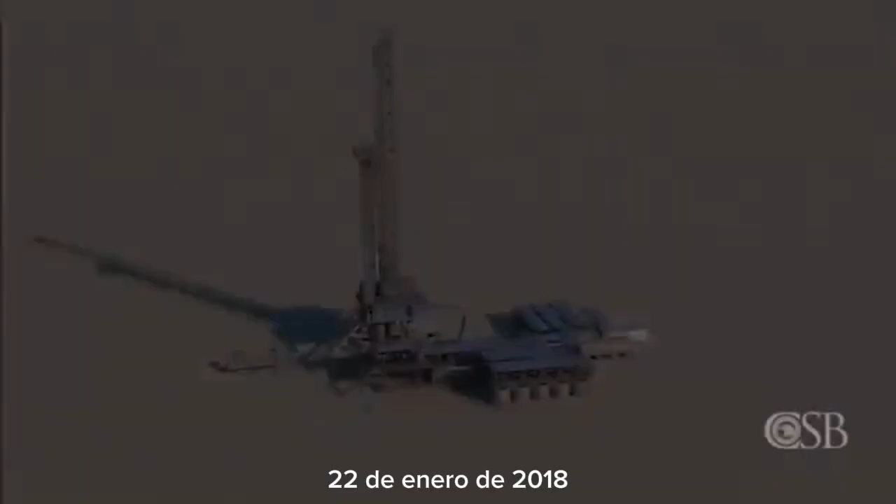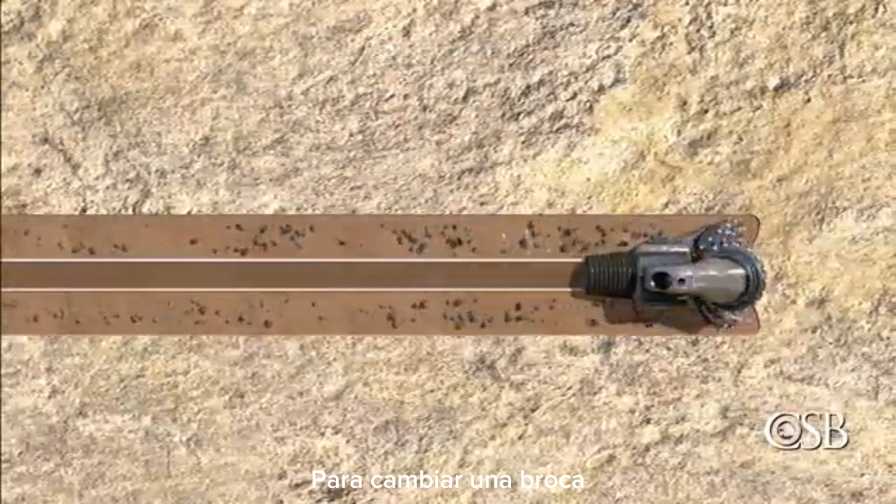January 22, 2018, the Pryor Trust gas well in Pittsburg County, Oklahoma. The well was operated by Red Mountain Operating LLC, which contracted the Patterson-UTI Drilling Company to drill the well. In order to change a drill bit, crew members removed the drill pipe from the well. Approximately 3.5 hours later, a blowout and rig fire occurred, killing 5 workers.

Industry best practices recommend having 2 protective barriers in place at all times during drilling operations. But our investigation into the incident at the Pryor Trust well found that both of those barriers failed. The safety management system utilized at the well was simply not effective, and the result was a catastrophic blowout and fire.

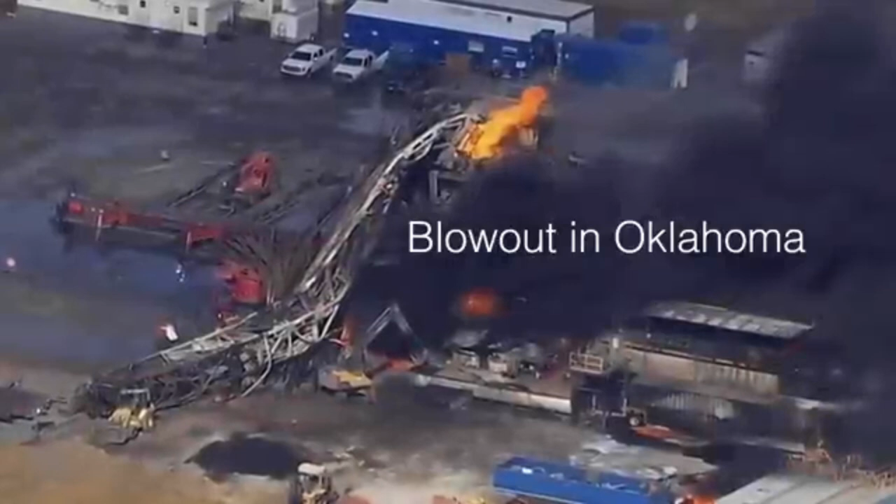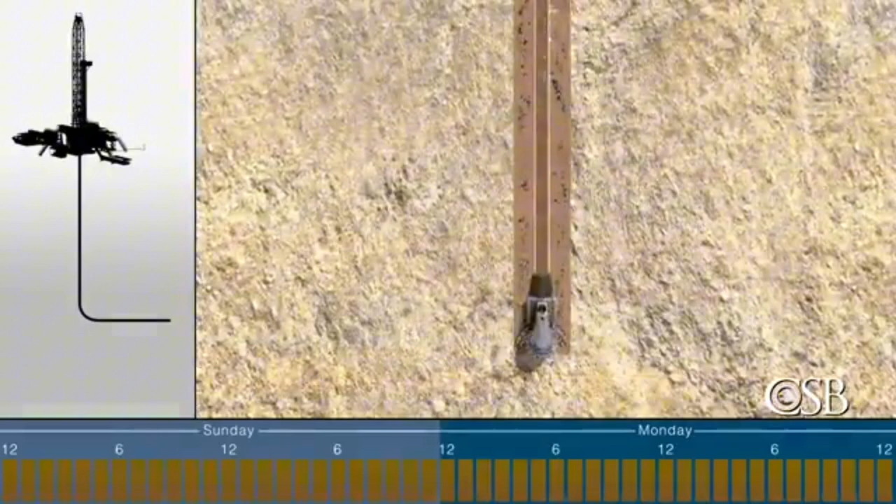The Pryor Trust gas well was comprised of vertical and horizontal sections being drilled to reach underground natural gas in the Woodford Geological Formation. During drilling, a diesel oil-based liquid called mud is pumped down through the drill pipe and back up through the area of the well outside of the drill pipe, called the annulus.

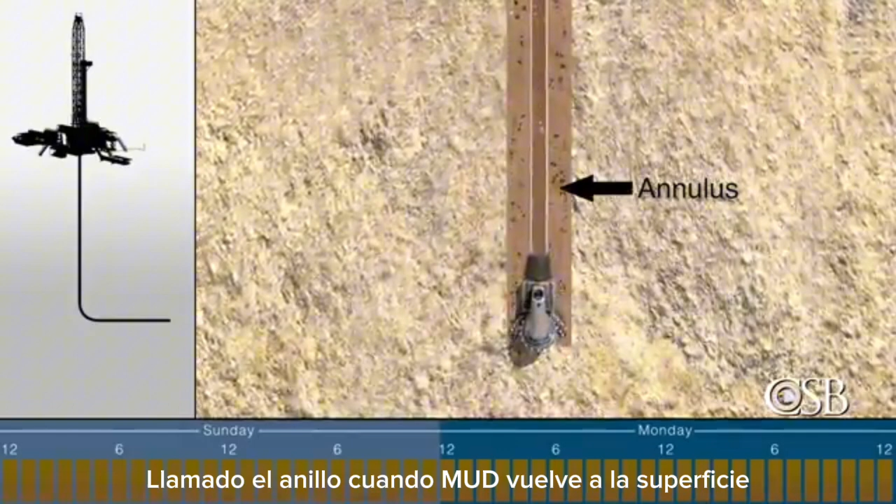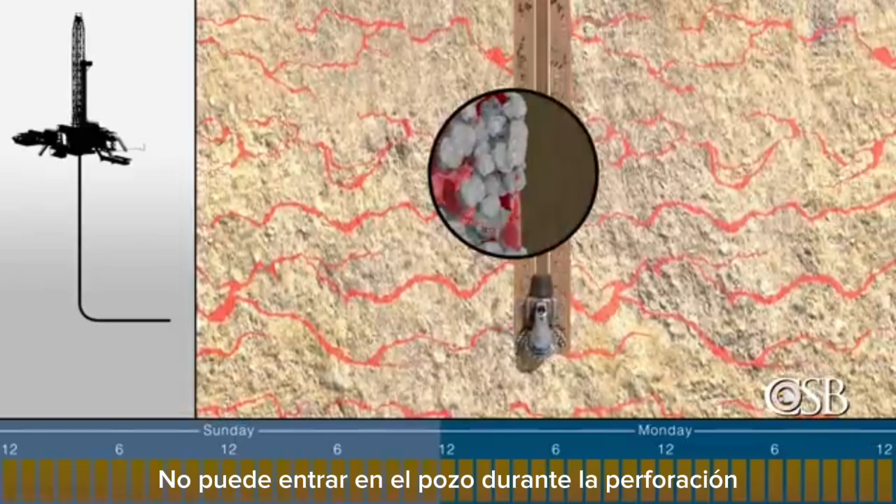When mud returns to the surface, it includes rock cuttings from the bottom of the well. Mud, however, has another important function. It is designed to add pressure to the well so that gas within the exposed geological formation is unable to enter the well during drilling. If that happens, and the gas is not detected, it can lead to a dangerous blowout.

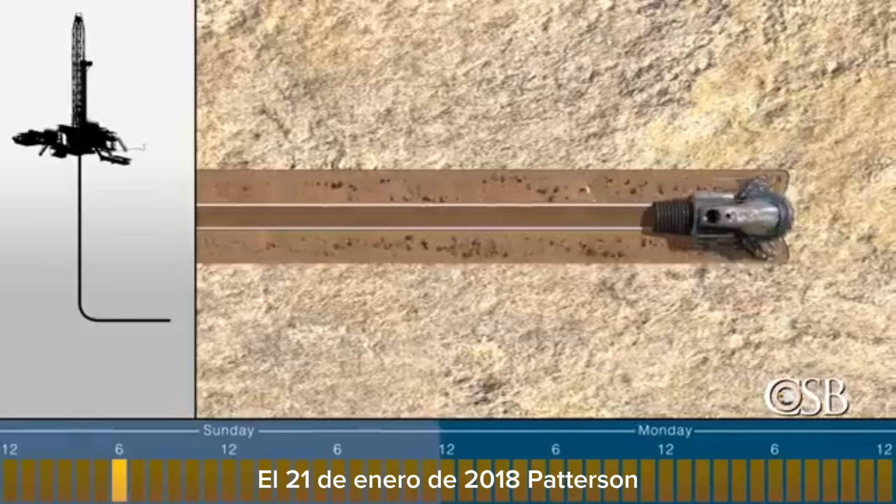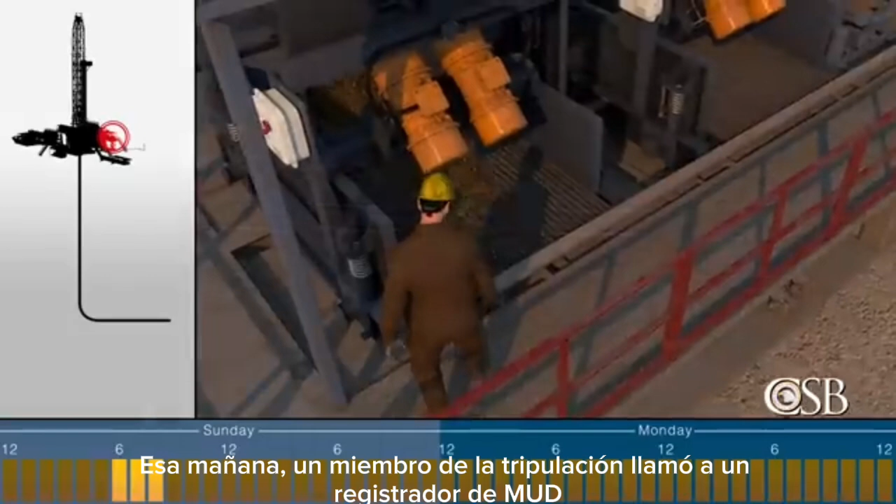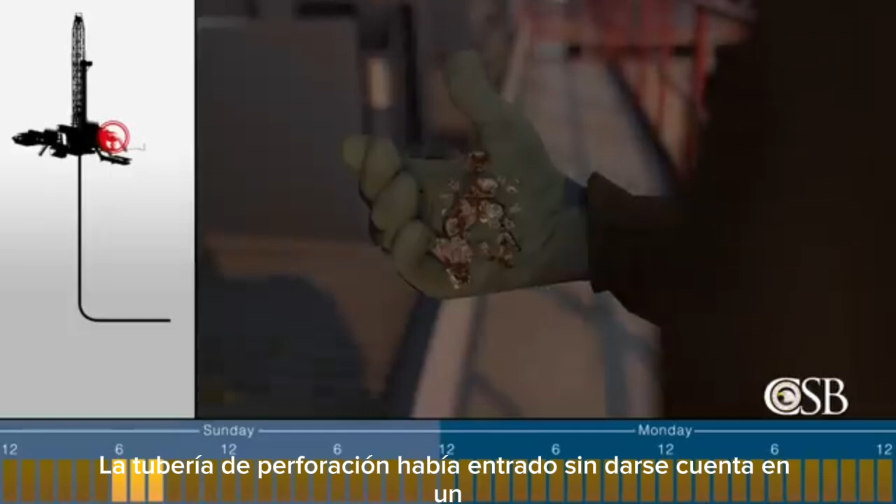On January 21, 2018, Patterson crew members had been drilling the well for 10 days under the supervision of 2 contracted representatives from Red Mountain. They were drilling the horizontal section of the well. That morning, a crew member called a mud logger studied the rocks returning to the surface and found they were different than expected. He believed the drill pipe had inadvertently entered a different geological formation where Red Mountain did not intend to drill. Shortly after, gas started to escape from mud returning to the surface.

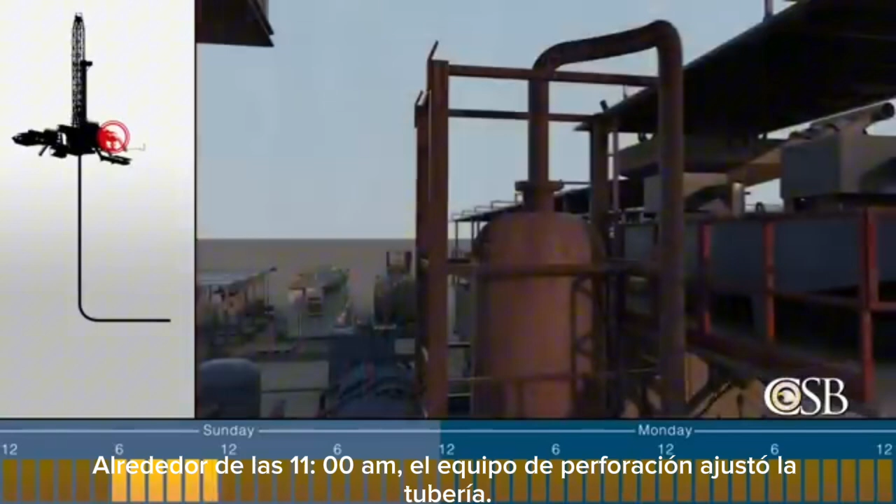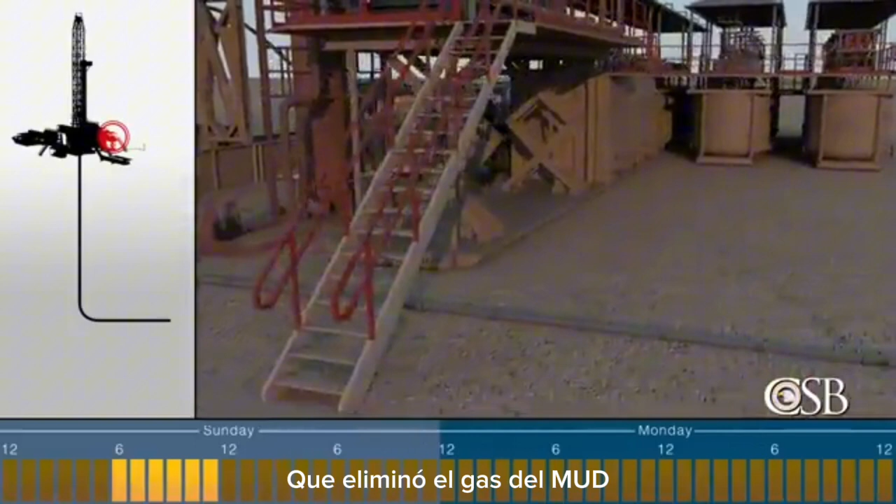The gas caused mud to spit out of equipment near the well and cover a portion of the rig. Around 11 a.m., the drilling crew adjusted piping so that mud returning from the well was routed to a piece of equipment called a mud gas separator that removed the gas from the mud. The separated gas was then routed to a flare to safely burn it.

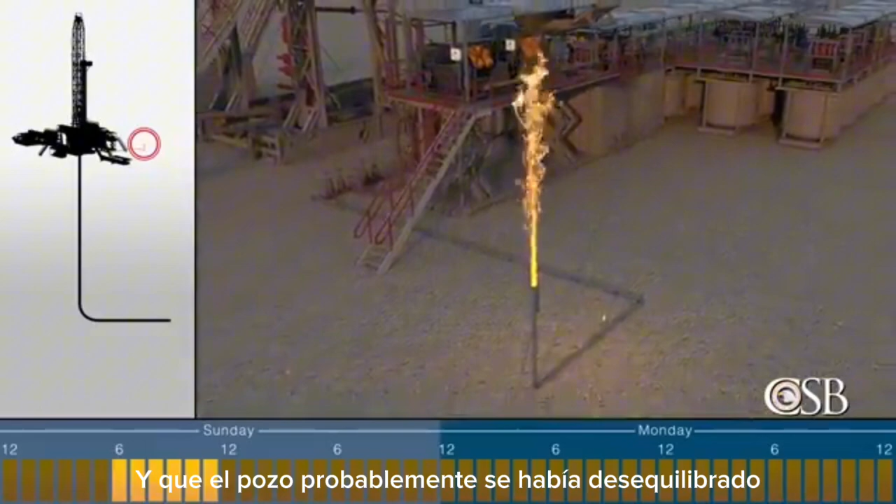The size of the flare indicated that there was a significant amount of gas in the mud and that the well had likely become underbalanced, meaning that pressure from the mud was not keeping gas out of the well as intended. The crew continued drilling underbalanced until 3:30 p.m., when they stopped because the drill bit had become worn and needed to be replaced.

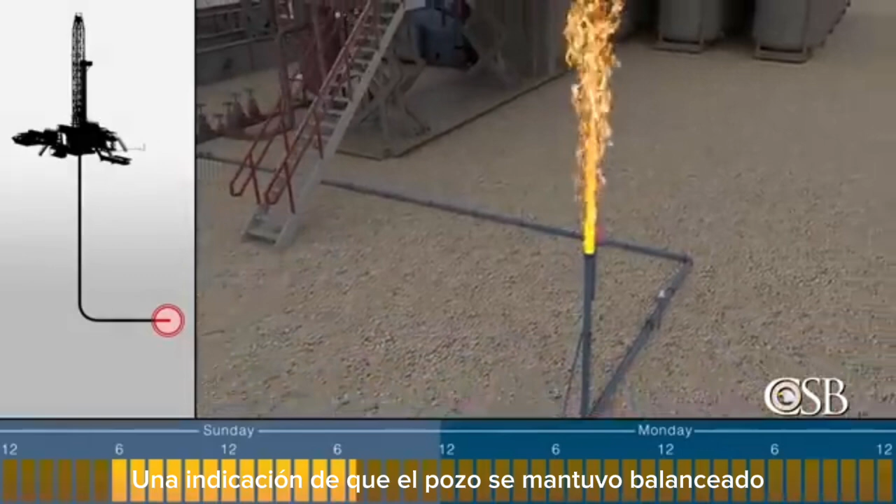The crew first circulated the well for 3 hours by pumping mud down the drill pipe and up the annulus. The flare continued while the well was circulating, an indication that the well remained underbalanced. While circulating, the Red Mountain representatives discussed how to remove the drill pipe from the well in order to replace the drill bit. The process to remove a drill pipe is called tripping.

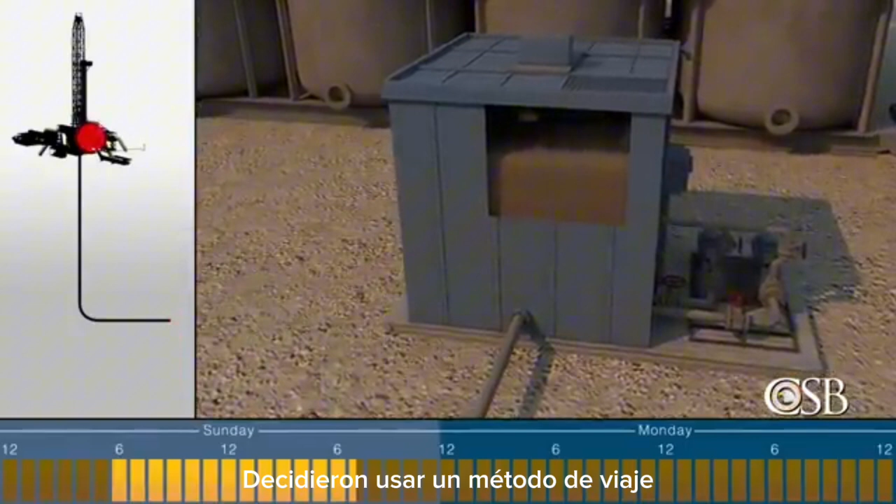During any tripping operation, mud is pumped into the well to replace the volume of drill pipe being removed, which prevents gas from flowing into the well. In this case, the Red Mountain representatives decided to use a tripping method called calculated fill, which involved periodically pumping a calculated amount of mud into the well as the drill pipe was removed. They believed this method would keep the well contained if gas entered during the operation.

But it was not a standard tripping method during normal drilling, so no one on the Patterson crew had performed it before, and they had no written procedure. The crew started removing the drill pipe at 6:47 p.m.

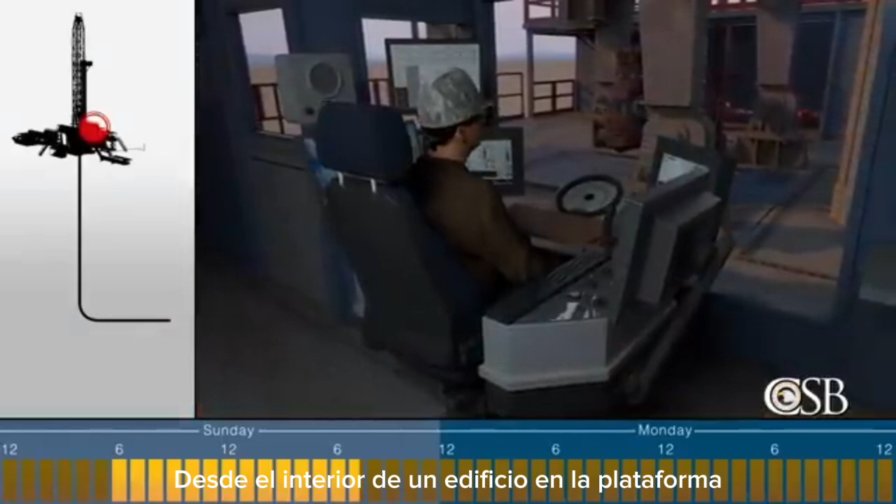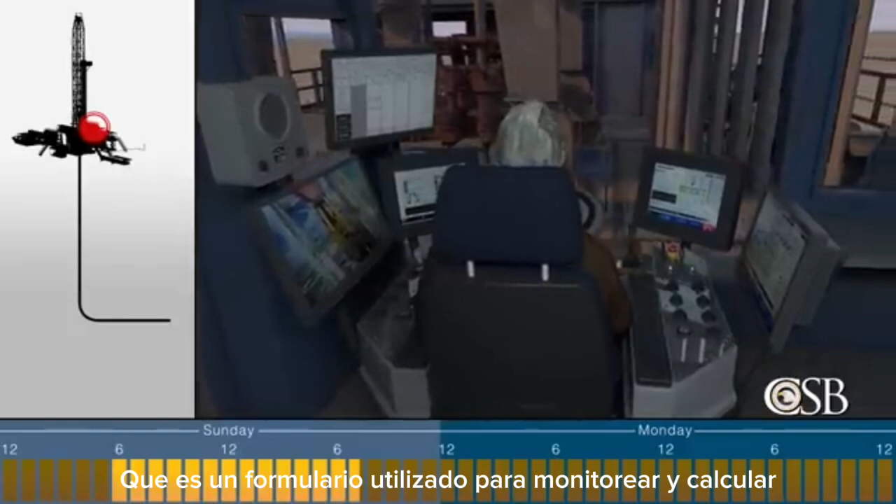The CSB found that while tripping the drill pipe from the horizontal section of the well, not enough mud was pumped and gas entered the well. The driller, who was controlling the operation from inside a building on the rig called the driller's cabin, did not see the discrepancy. That is because he had not been sufficiently trained on a new electronic version of a trip sheet, which is a form used to monitor and calculate whether a well is taking the proper amount of mud during tripping.

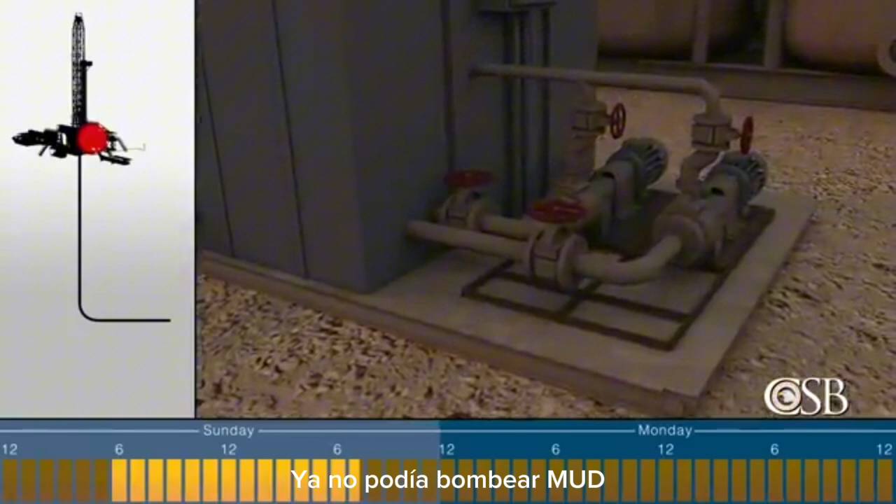As a result, he was unable to see that a significant amount of gas continued to enter or expand within the well, causing pressure in the well to increase and mud to backflow into a tank at the surface called the trip tank. In fact, pressure at the surface of the well had increased so much that the centrifugal pump the crew was using was no longer able to pump mud against the pressure of the well.

Red Mountain's representatives decided to switch to higher pressure pumps, called mud pumps, to try to force mud into the well. They believed that the pressure applied by the new pumps would push any gas out of the well.

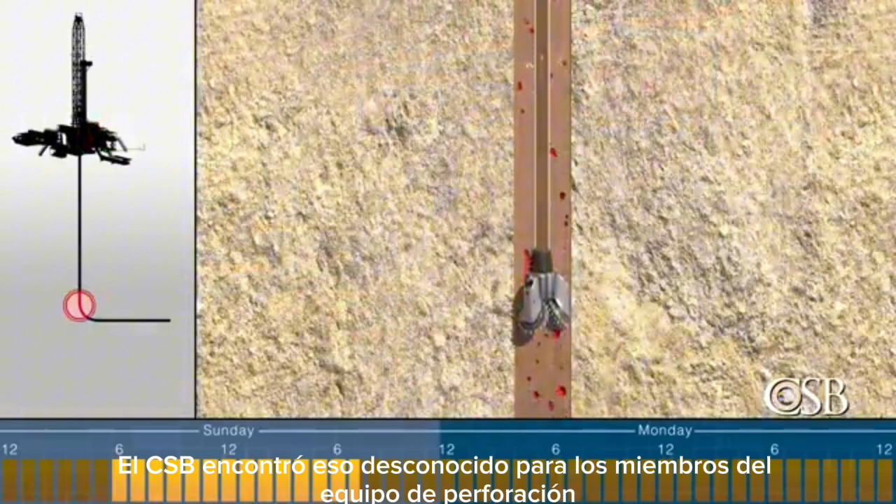But by the time the drill bit reached the top of the curve in the well, the CSB found that, unknown to drilling crew members, 20 barrels of gas had entered or expanded within the well. At that time, the drilling crew performed a 45-second flow check to see if gas was flowing in the well. The crew did not observe any flow of gas and believed the well to be stable, but the CSB determined that the flow check was inadequate.

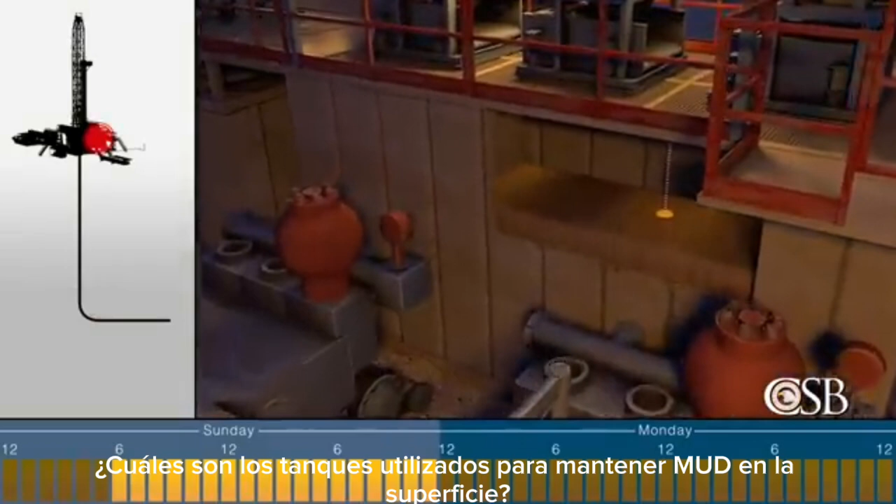At 11 p.m., the drilling crew again circulated the well. While circulating, the rig's mud pits, which are tanks used to hold mud at the surface and are equipped with level sensors, gained 14 barrels of mud when they should have remained stable.

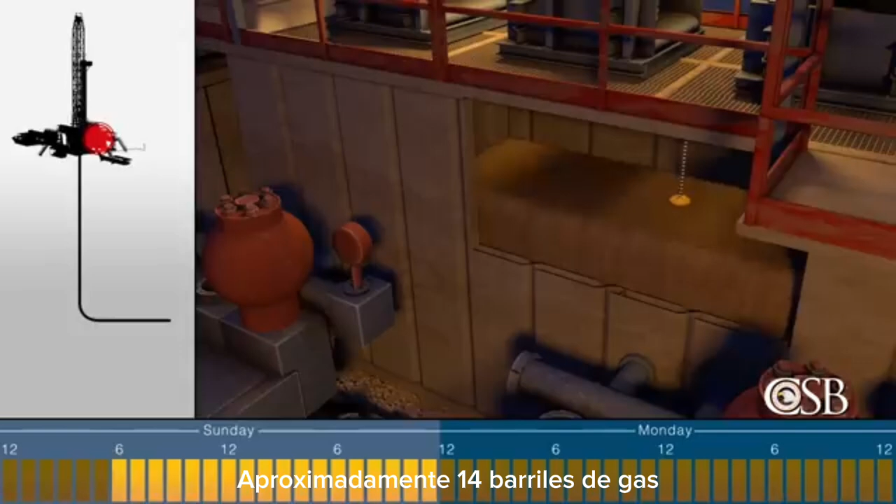This meant that the well gained approximately 14 barrels of gas, which caused the mud to escape at the surface. But the night shift driller had turned off the alarm system before the tripping operation, and no alarm sounded, so the large gain went unnoticed.

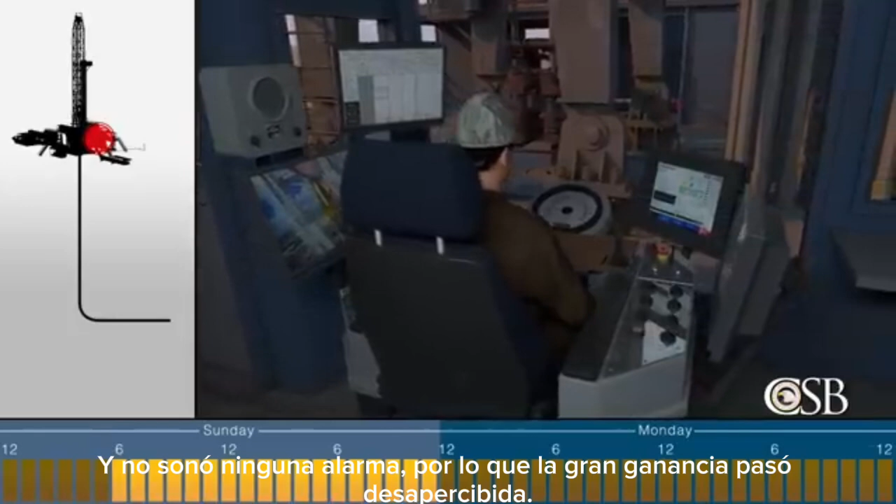Red Mountain's representatives then decided to pump a weighted volume of mud, called a pill, into the well, meant to generate enough pressure to prevent gas from entering the well.

But a Patterson drilling crew member misheard Red Mountain's instructions over the radio, and they accidentally added lost circulation material to the pill. This material is designed to clog breaches in the well and is not intended to be in weighted pills. Although the mistake was discovered, the pill containing the lost circulation material was pumped down to the bottom of the drill pipe, clogging it.

By 1:12 a.m. on January 22nd, the crew started to remove the drill pipe from the vertical section of the well, this time using the typical industry tripping method called continuous fill, where mud is pumped continuously into the well as the drill pipe is removed. But because the drill pipe was clogged, the mud was not freely draining into the well.

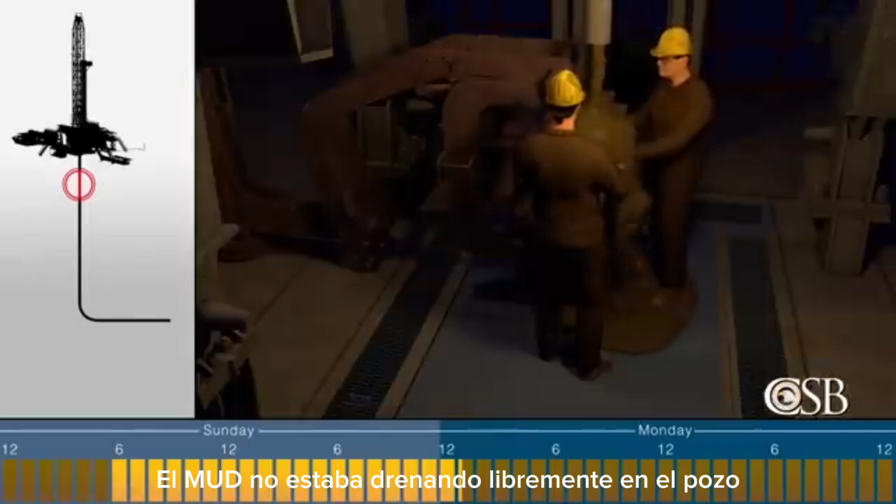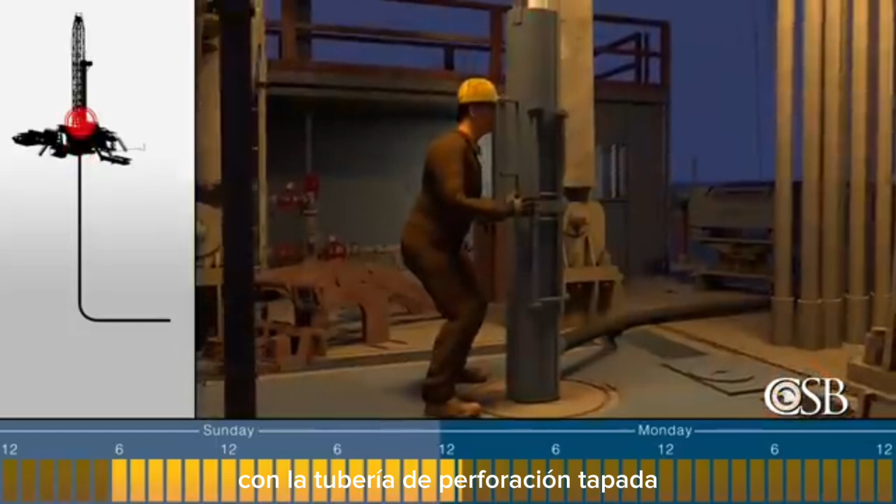The crew attempted to pump a weighted slug of mud into the drill pipe to push the clogged mud out, but this was not successful. With the drill pipe plugged, the drilling crew had to trip wet, meaning mud was in the pipe sections being removed at the surface. The drilling crew used what is known as a mud bucket to collect the mud from the drill pipe, which they drained into the trip tank.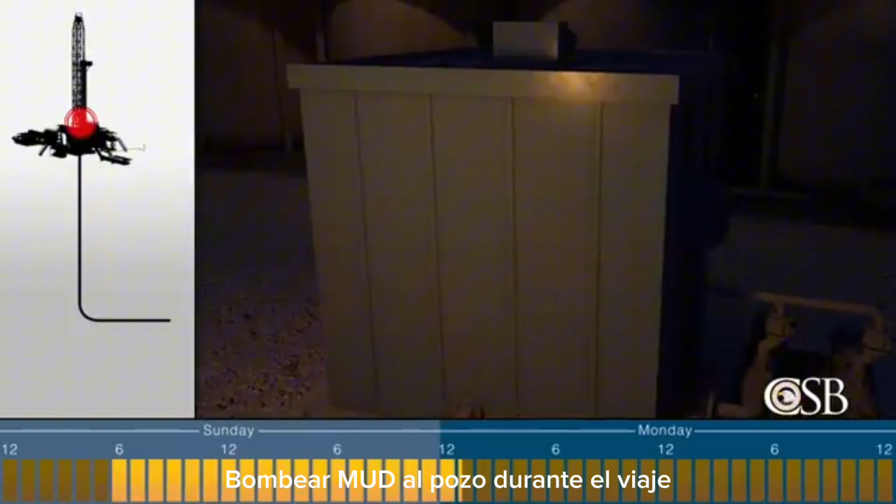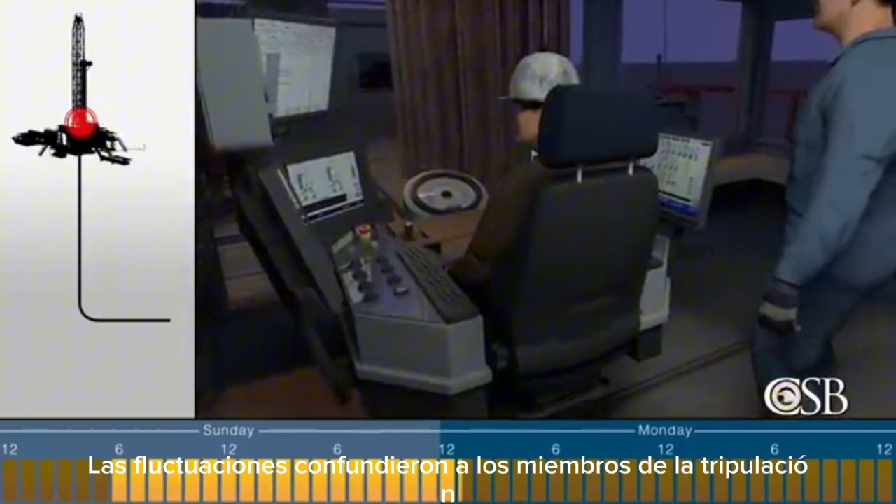But the trip tank was also used to pump mud into the well during tripping. So the trip tank volume started to fluctuate as mud was pumped out to the well and drained in from the drill pipe. The fluctuations confused crew members, and they did not realize that while the drill pipe was removed from the vertical section, the well gained another 23 barrels of gas.

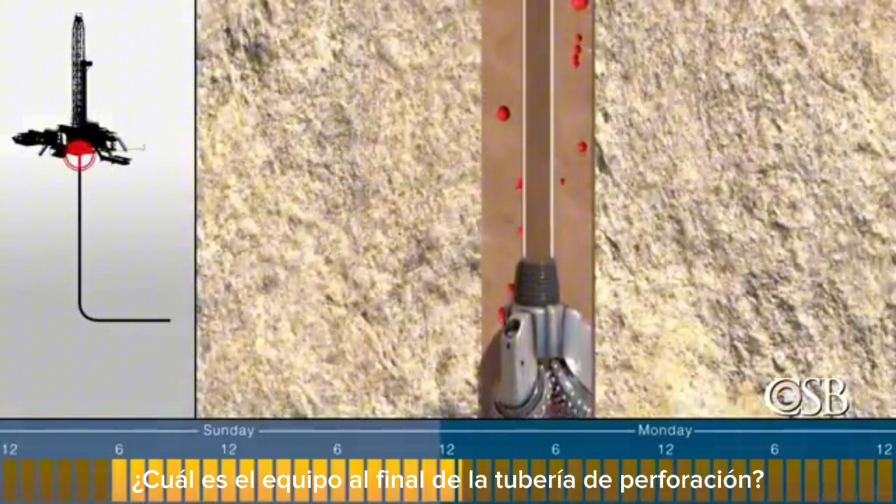When the bottom hole assembly, which is equipment at the end of the drill pipe that includes the drill bit, was near the top of the well, the crew finally removed the plugged part of the drill pipe. For the next hour, they tried to clear the clog.

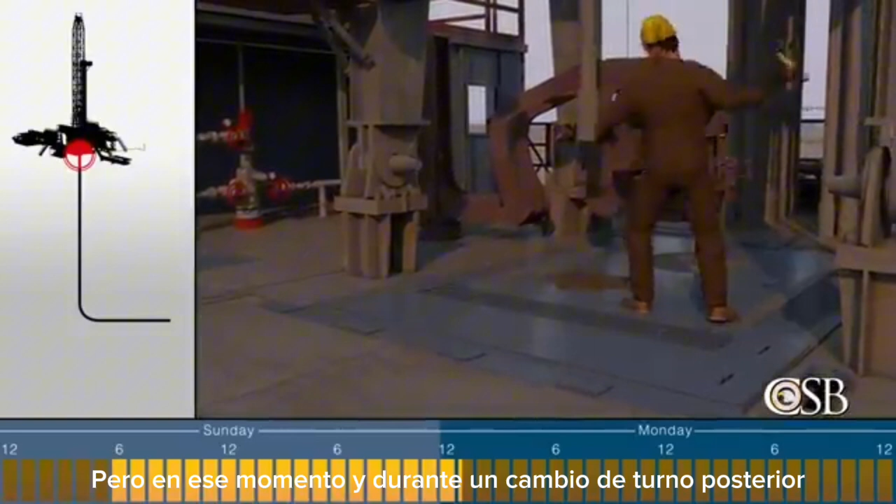But at that time, and during a subsequent shift change, the well was still flowing, gaining another 31 barrels of gas and pushing more mud into the trip tank. No one saw the gain.

At 6:00 a.m., the crew lifted the bottom hole assembly out of the well and closed the blind rams on the blowout preventer. They prepared a new bottom hole assembly for testing.

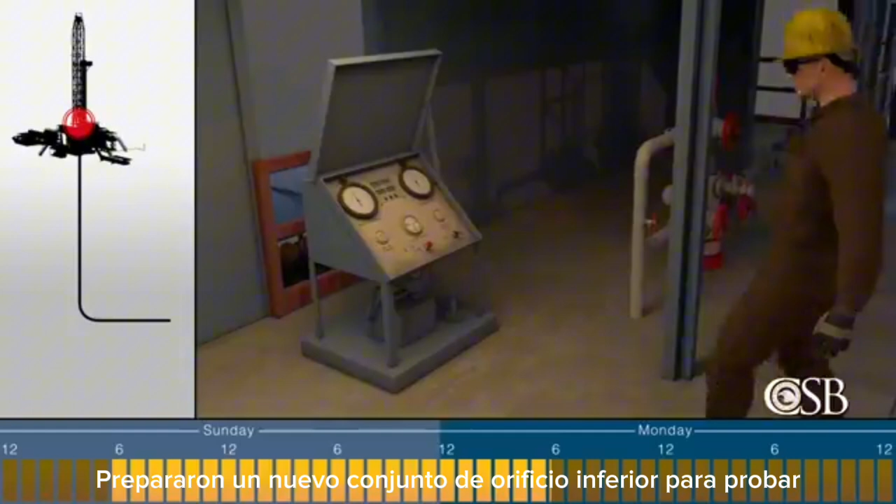When it was ready, a drilling crew member checked a pressure gauge on the rig floor to see if it showed pressure in the well, a safety precaution used before opening the blowout preventer. The pressure gauge showed no pressure.

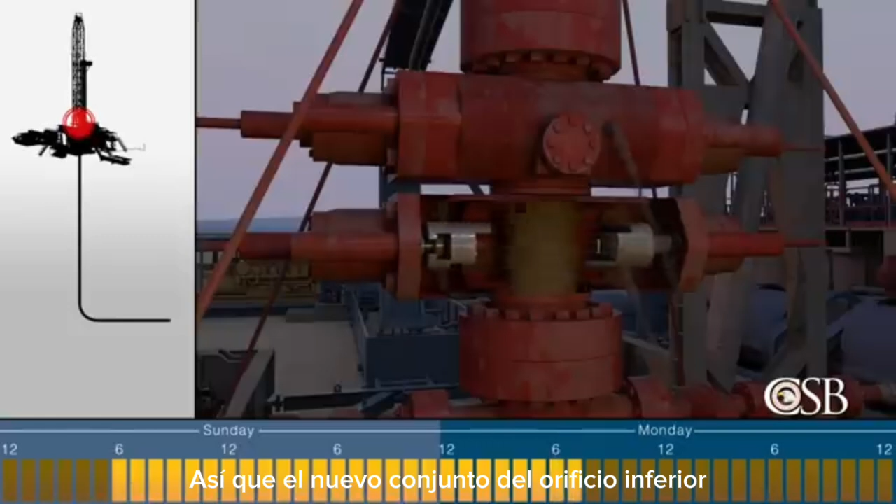But at 7:57 a.m., when the blind rams were reopened so the new bottom hole assembly could be lowered into the well, 5 barrels of mud surged to the mud pits.

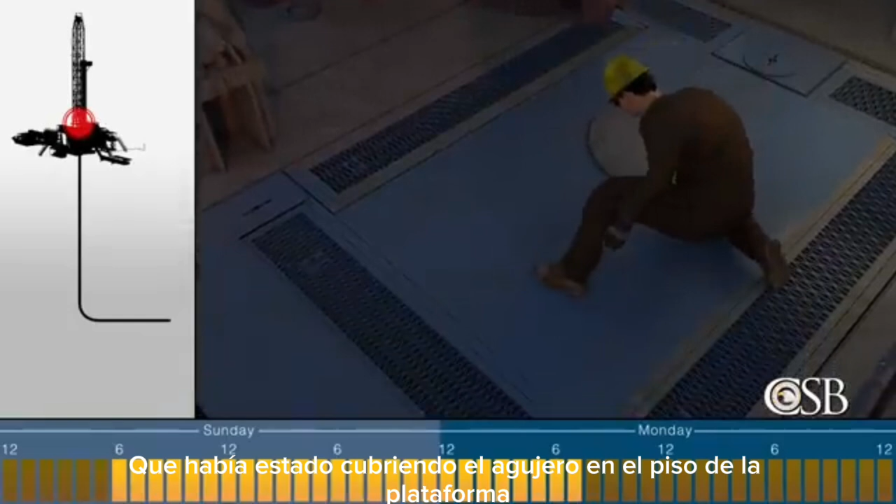At that time, a crew member pulled away the steel plate that had been covering the hole in the rig floor over the well. He waved over another worker who saw mud bubbling in the well, a sign that there was a significant amount of gas in the mud. That worker later told the CSB that he does not know if the mud bubbling was communicated to the driller.

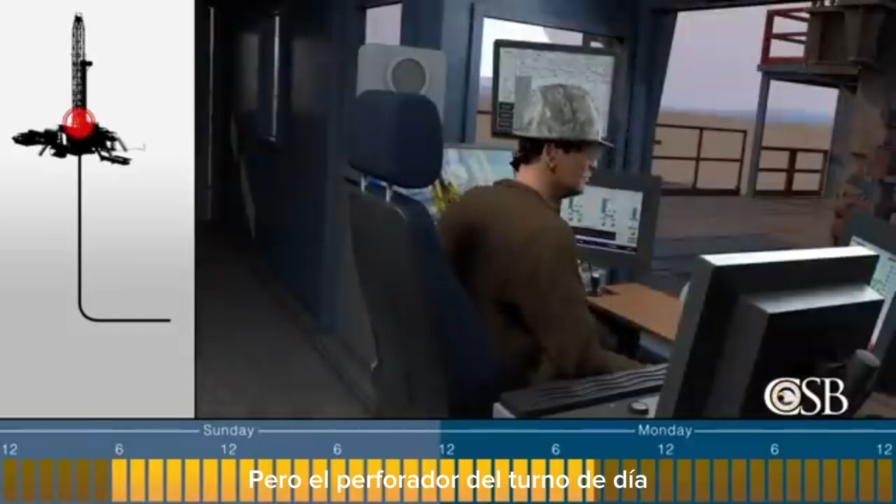Between 7:57 a.m. and 8:35 a.m., while the drilling crew was testing the new bottom hole assembly, the mud pits gained another 102 barrels of mud, a very large volume. This significant gain likely displayed on the driller's data screen, but the day shift driller also chose to turn off the alarm system, and it is unknown if the driller saw this dangerous gain.

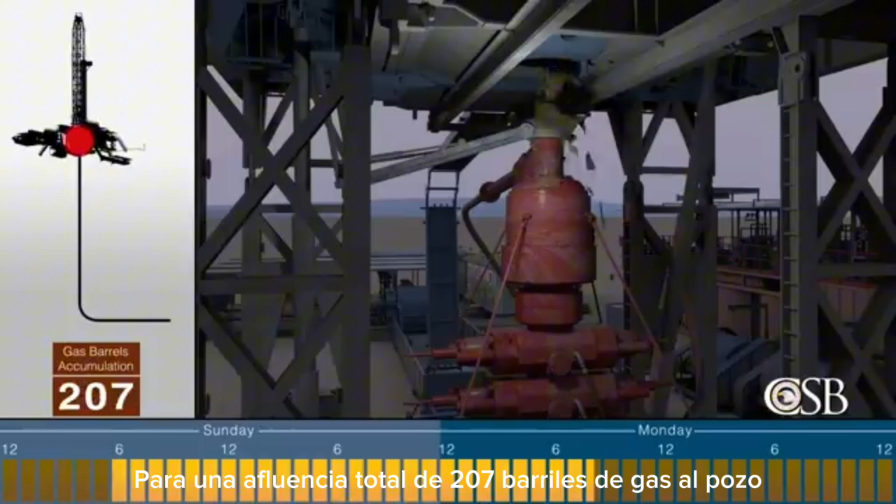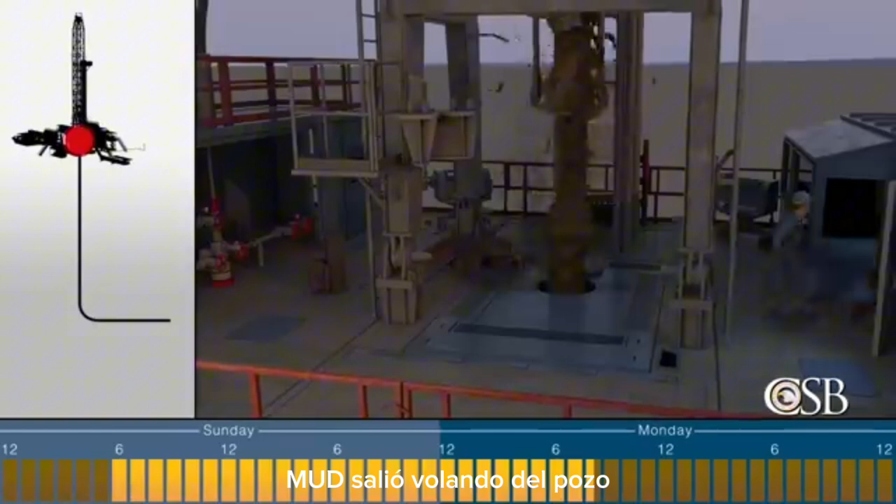At 8:35, with testing complete, the bottom hole assembly was removed from the well, and the mud pits gained another 12 barrels of mud, for a total influx of 207 barrels of gas into the well from the start of the tripping operation. A crew member saw mud flowing up out of the open blowout preventer stack, shooting up steadily and getting closer to the rig floor. The crew member told the driller, and the driller responded that he was going to close the blind rams, but he never made it. Seconds later, mud blew upwards out of the well in what is known as a blowout.

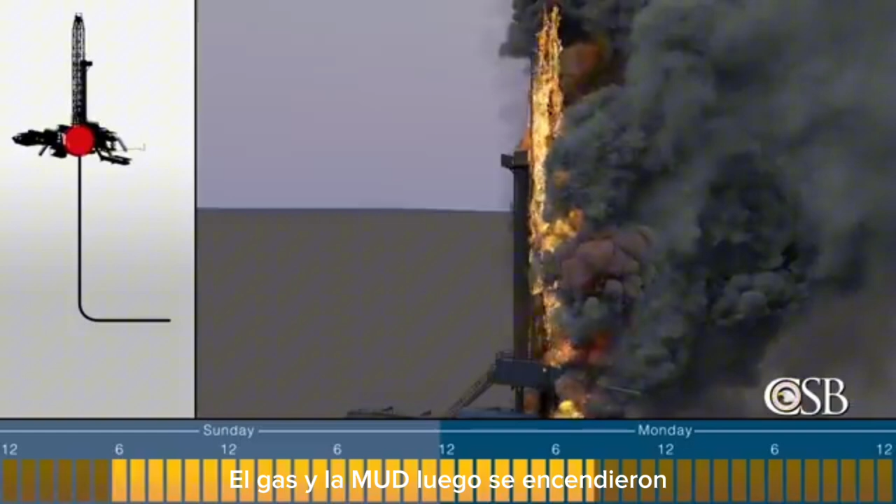Two workers on the rig floor ran into the driller's cabin, where three other workers were already located. The gas and mud then ignited, causing a massive fire. All five people in the driller's cabin were killed.

The blowout continued for hours until a well control services company was able to shut in the well around 4 p.m.

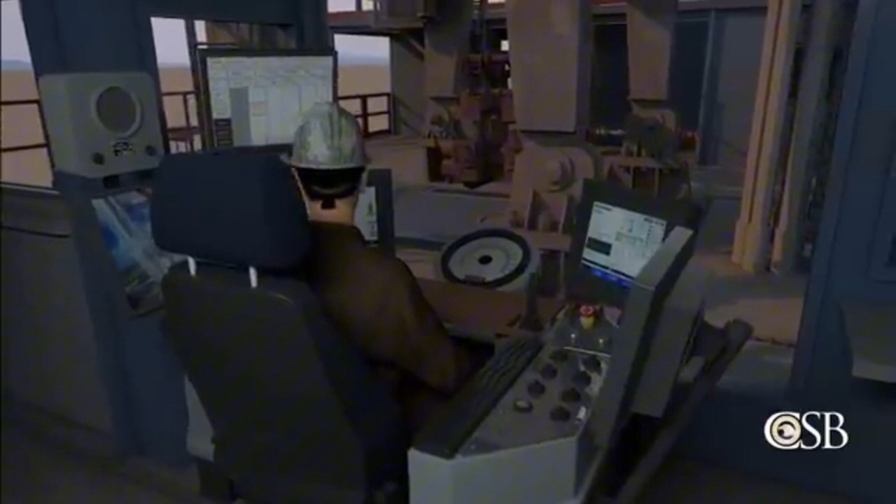During its investigation, the CSB found data indicating that on the evening prior to the blowout, the night shift driller turned off the entire alarm system. Data also indicates that the day shift driller briefly turned on the alarm system, but then quickly turned it off again on the day of the incident. Other than that short period, the alarm system was off for 14 hours, leading to the blowout.

We were not able to conclusively determine why the drillers turned the alarm system off. A possible reason is that the alarms were perceived as a nuisance or an annoyance. In fact, we found that had the alarm system been on, most of the alarms that would have activated during the 14 hours leading up to the incident likely would have been irrelevant to detecting the problems in the well.

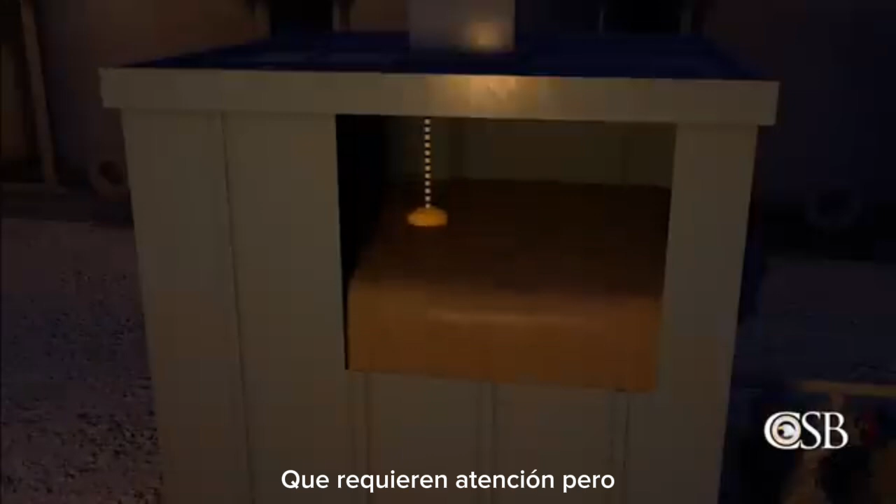For an alarm system to be effective, it must be configured so that the driller only receives alerts to conditions that require attention. But the CSB found that Patterson did not develop guidance to help drillers set the alarm system for the various operations performed on the rig, such as drilling, tripping, and circulating. Instead, to manage the alarm rate, both drillers apparently elected to simply turn off the alarm system.

We concluded that a state-based alarm strategy is one way to solve this issue. For example, on a drilling rig, there could be different active alarms for each operation, such as drilling, tripping, and circulating, so that alarms critical to a certain operation do not become a nuisance when operating in a different state where those alarms are not needed.

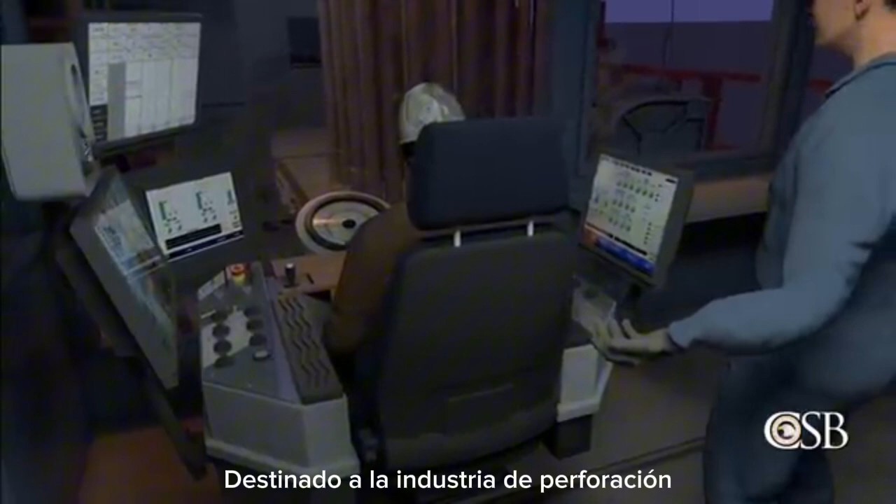Although there is a large body of guidance and recommendations on the design of alarm systems for hazardous operations, none are specifically targeted for the drilling industry. As a result, the CSB made a recommendation to the American Petroleum Institute to develop a standard on alarm management, specifically for the drilling industry, that addresses drilling's unique dynamic environment and provides guidance on implementing a state-based alarm system for different operating modes.

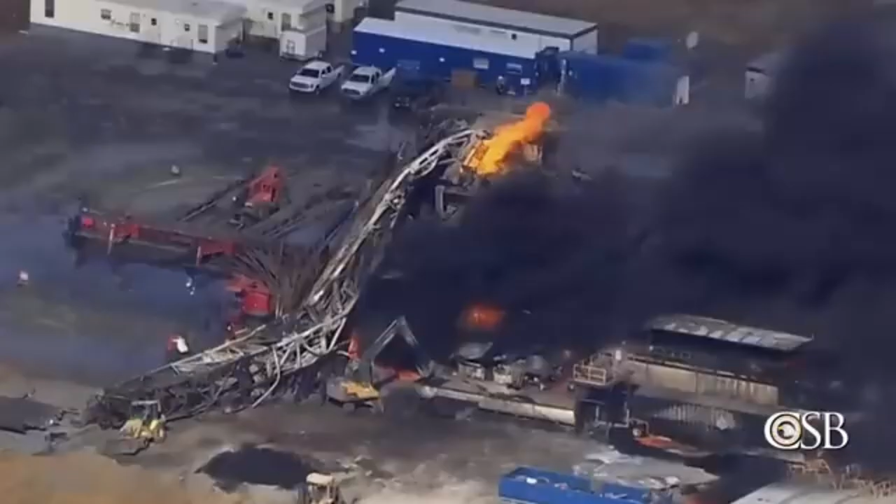When the blowout started, two crew members on the rig floor ran inside the driller's cabin. Three other crew members were already in the driller's cabin, and all five workers were killed. It is unknown how long the victims remained alive inside the driller's cabin, but they had no viable escape routes.

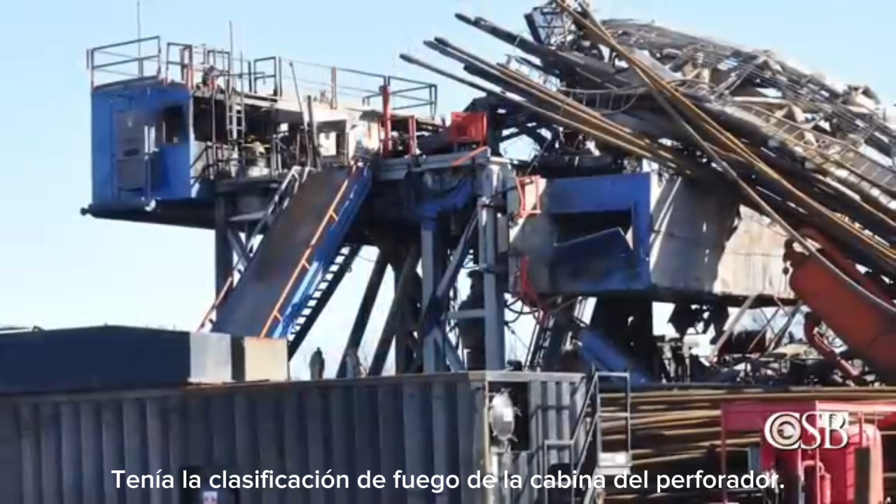There were two exit doors from the driller's cabin, but both of those exit doors were blocked by flames after the gas and mud ignited. The CSB concluded that had the fire rating of the driller's cabin been ensured for a minimum time, with emergency escape options from the floor or from the back wall, there could have been a better chance for the workers inside to have survived this incident.

Stan Christman is a drilling expert who consulted with the CSB on the Pryor Trust investigation.

On a drilling rig, the operations are controlled from the driller's cabin by the key man, the driller. And he has a crew that works for him on the rig floor. The driller's cabin is located right next to the rig floor. He can see, talk over radio, even directly to the crew and get things done.

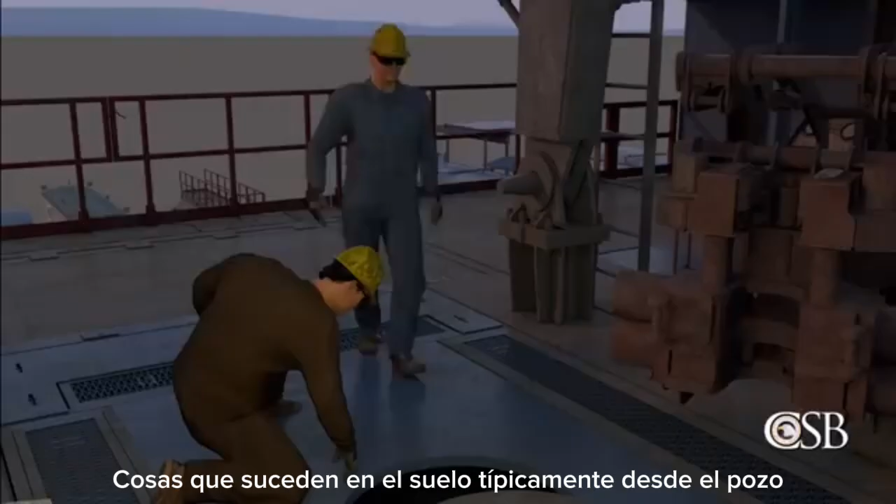Having the driller's cabin near the rig floor puts it closer to the hazards, and that is things happening on the floor, typically from the well. And these hazards are things that we could probably think further about. How do we improve the reliability and safety of these cabins for these unusual events?

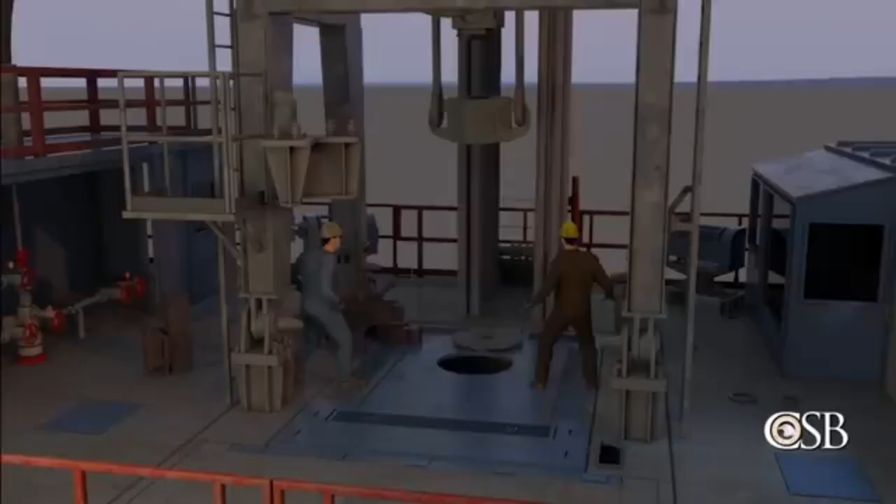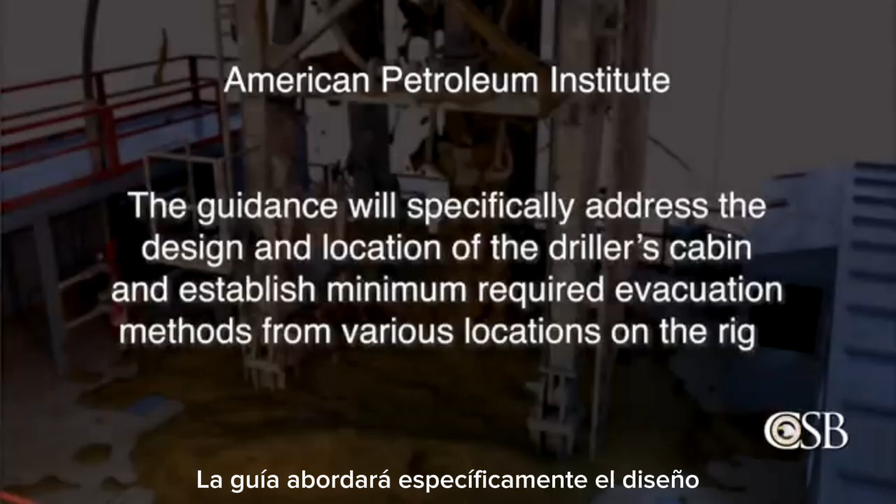Although there are best practices within the chemical industry for the location and design of control rooms, there is no guidance specific to drilling. As a result, the CSB made a recommendation to the American Petroleum Institute to develop guidance addressing the protection of onshore rig workers from fire and explosion hazards in the event of a blowout. The guidance will specifically address the design and location of the driller's cabin and establish minimum required evacuation methods from various locations on the rig.

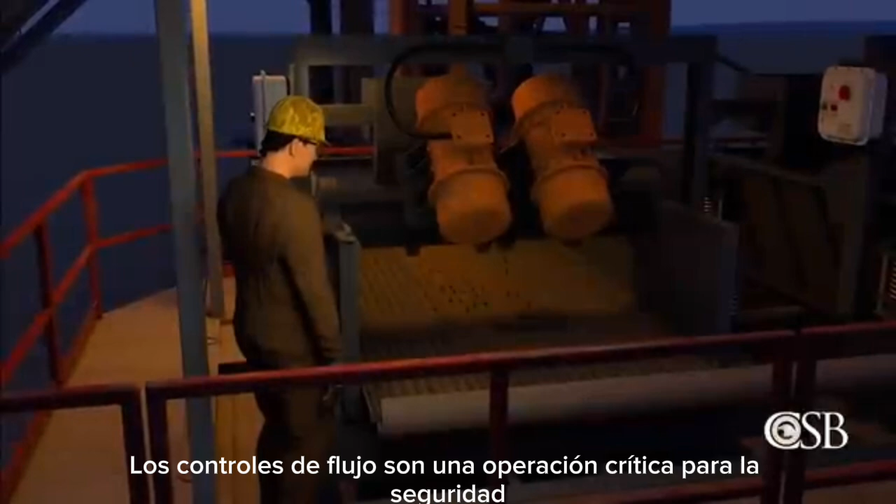Flow checks are a safety-critical operation used to determine if gas or other formation fluids have entered a well, which could lead to a blowout.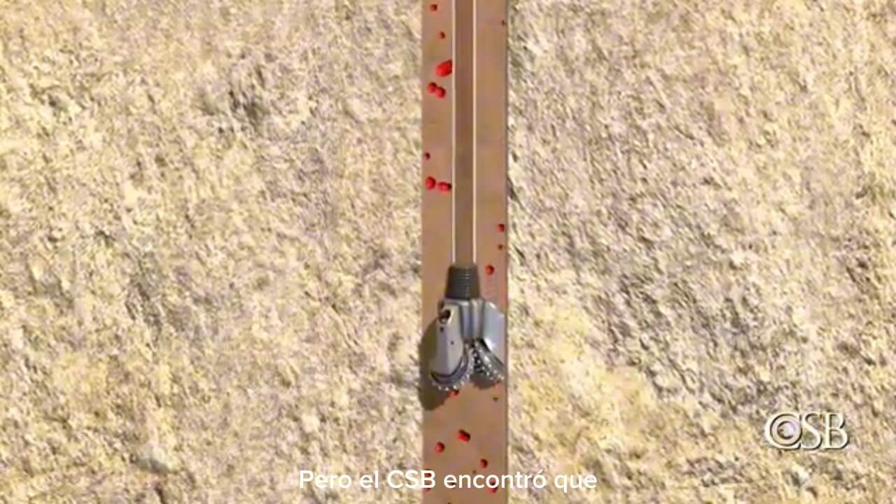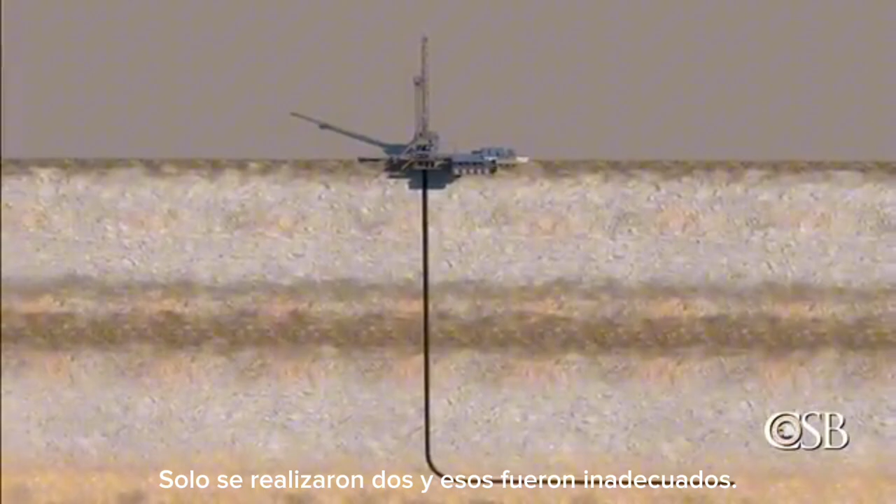Patterson policies required flow checks to be performed at various times during the tripping operation. But the CSB found that of the 27 flow checks that were required by Patterson during the drilling of this well and the previous well, only 2 were performed, and those were inadequate. There was a culture on this rig that accepted the non-performance of flow checks. Performing flow checks during the tripping operation, as required by Patterson, could have identified that the well was flowing and could have prevented the blowout.

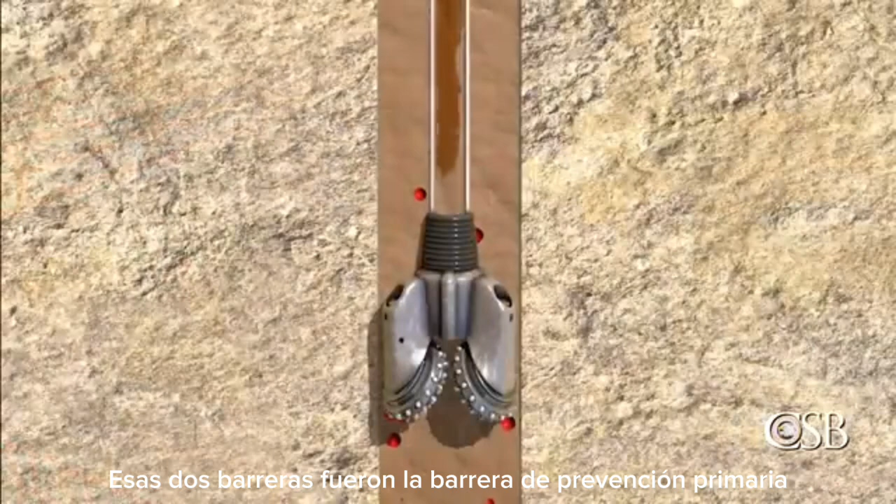The CSB found that the cause of the blowout and rig fire was the failure of both barriers that should have been in place during the operations leading to the blowout. Those 2 barriers were the primary prevention barrier, hydrostatic pressure produced by drilling mud, and the secondary mitigation barrier, human detection of gas entering the well and activation of the blowout preventer.

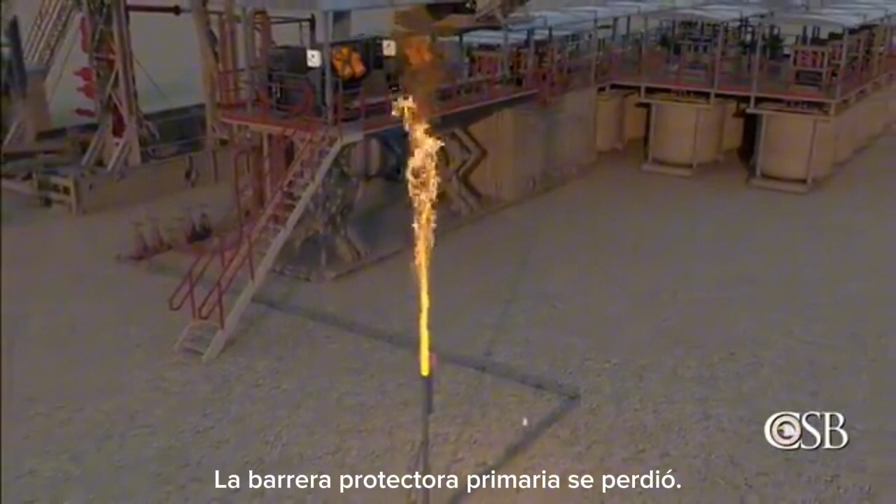When the well became underbalanced on January 21st, the primary protective barrier was lost, but work was not stopped so that the barrier could be reestablished by increasing the weight of mud, and no analysis on the loss of the barrier was performed. We learned that Red Mountain had developed what they called a drilling prognosis, which is a type of well plan. But that plan did not specify what barriers were required or how to identify if a barrier was lost. And we found that development of a more comprehensive plan, such as what's known as the Well Construction Interface Document, which is used more widely in offshore drilling, was not required.

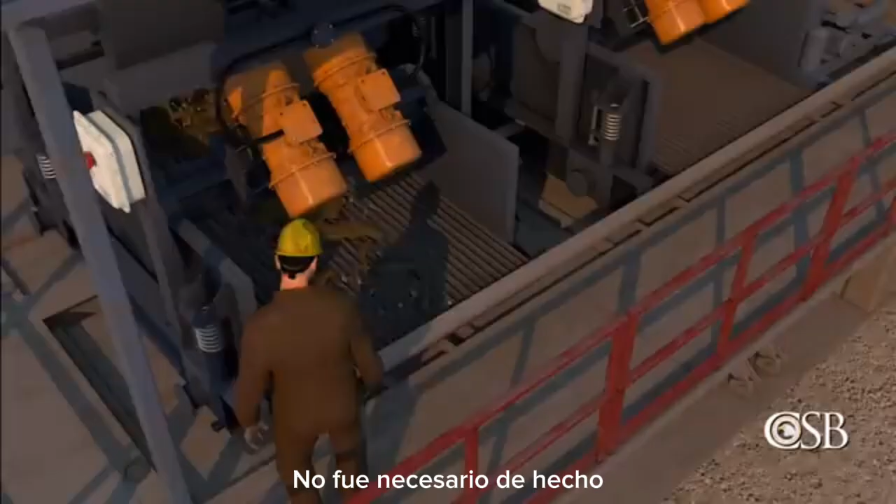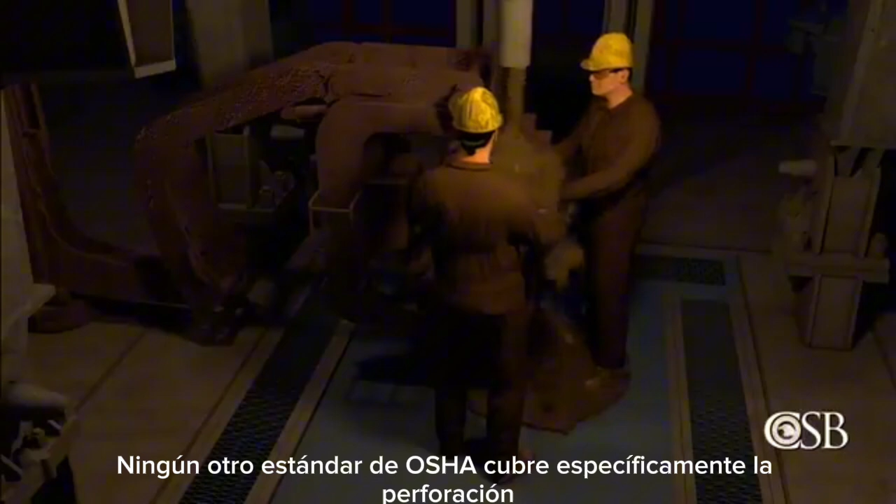In fact, there are minimal federal regulations governing the safety of onshore oil and gas drilling operations. The Occupational Safety and Health Administration's Process Safety Management, or PSM standard, which would require a hazard analysis of the operation, does not apply to drilling. No other OSHA standard specifically covers drilling, and no other federal regulatory body oversees the safety of onshore drilling operations.

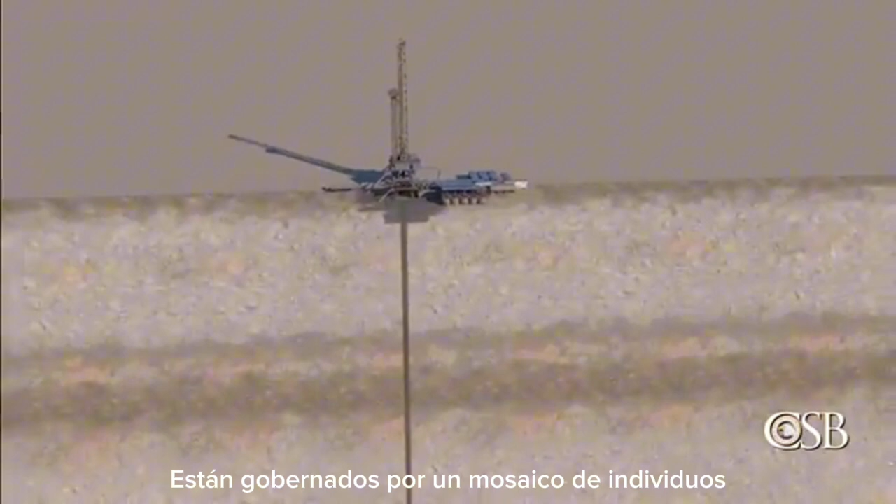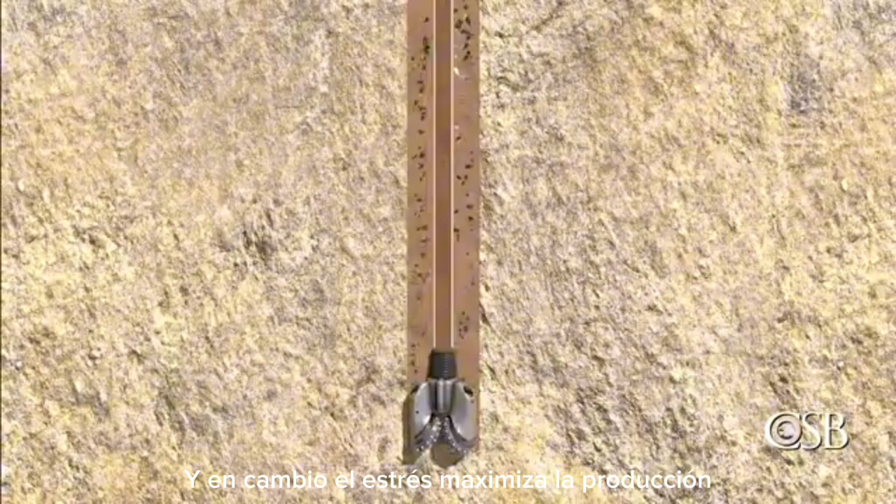With no federal safety standards for oil and gas, drilling companies are governed by a patchwork of individual state laws. During its investigation, the CSB determined that the laws in Oklahoma, where the incident occurred, are not focused on safety, and instead stress maximizing production and eliminating the loss of hydrocarbons.

The CSB believes more focused and specialized regulatory coverage, like the OSHA PSM standard for the chemical industry, is needed to better control the hazards inherent to drilling. With the requirement for a more effective safety management system, drilling companies can avoid incidents in a proactive manner, protecting both their workers and the environment.

As a result, the CSB made recommendations to OSHA to either apply the PSM standard to drilling of oil and gas wells or develop a new standard with a safety management system framework similar to PSM that applies only to the drilling of onshore oil and gas wells.

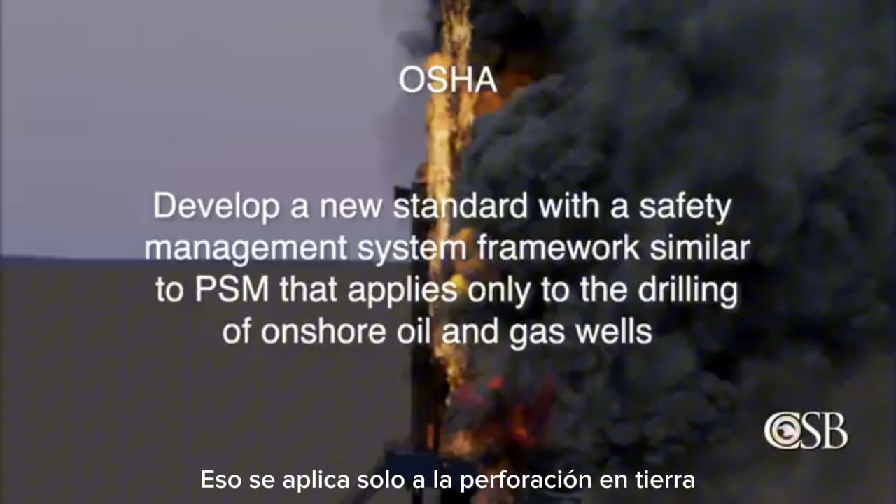To prevent similar blowouts, drilling contractors and operators should develop a well construction interface document, bridging the operators and drilling contractors' safety systems and providing a barrier plan, including how to monitor barriers and how to respond if a barrier is compromised. Create procedures for operations, including tripping.

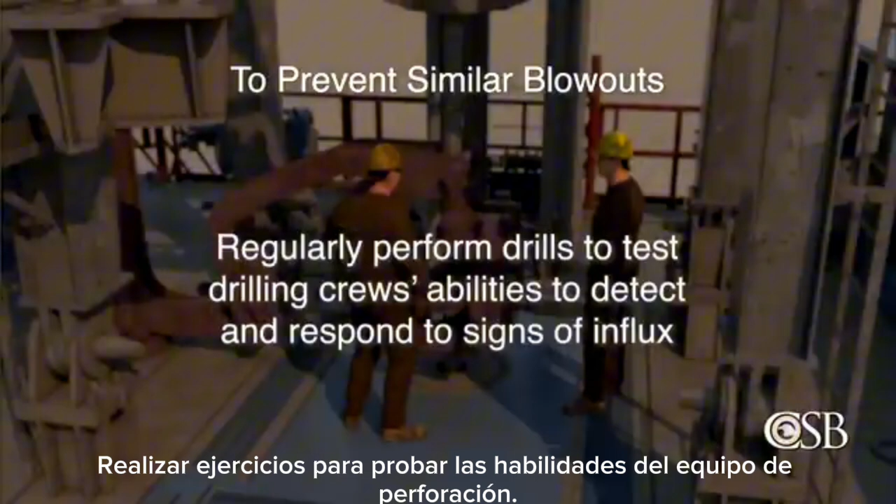Design alarm systems so that only the alarms indicating a condition needing drilling crew attention are active. Regularly perform drills to test drilling crews' abilities to detect and respond to signs of influx, and implement an indicators program to monitor and improve policy implementation rates.

The blowout and massive fire at the Pryor Trust well was completely preventable. We hope our findings and recommendations are used by the drilling industry to promote safer operations so that similar tragic incidents can be prevented. Thank you for watching this CSB safety video.